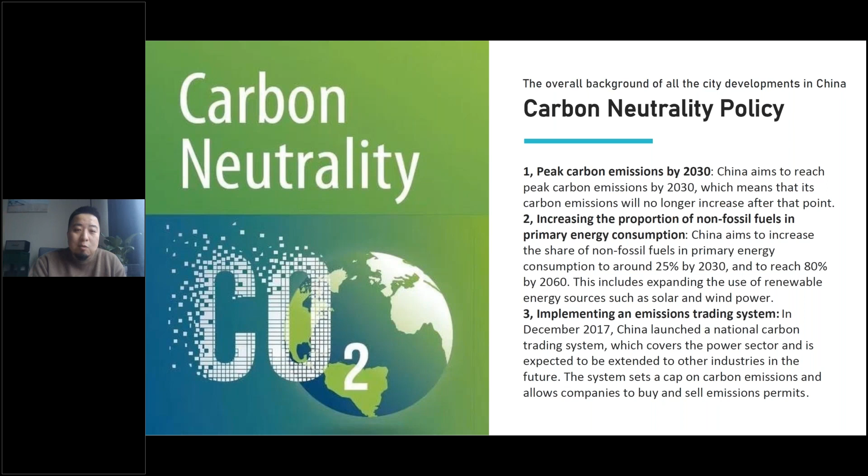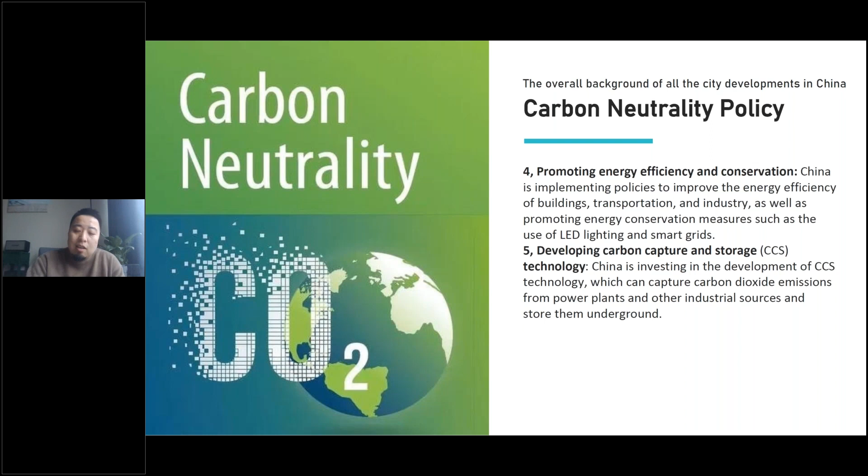By reaching that task, we have to do many things, but the one most related to our field of architecture and urban planning is number 4: promoting energy efficiency and conservation. This is the one I will explain in detail.

The first thing is, in order to control carbon emissions, we have to apply a green building standard. As we know, construction takes more than half of the entire carbon emission worldwide, so this is the first and very important thing we should do.

Until now, almost all government-funded buildings, including residential and public buildings, need to reach at least 2-star standards, and some even need to reach 3-star standards. Since time is limited, I won't read everything in detail, but if you're interested, I'll show you more in the Q&A section.

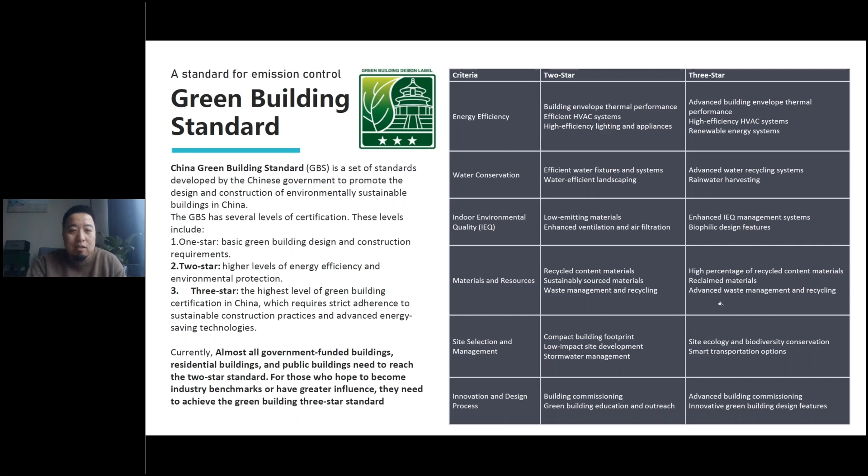The second thing, which is even newer, is that we just published a general code called the General Code for Building Energy Efficiency and Renewable Energy Utilization. This was implemented last year starting April 1st, and it's even more strict.

Looking at the numbers, the average energy saving for residential buildings has to be more than 75%, while public buildings should be at least 72%. Since it's very new, as architects we need to develop our design skills, but also seek more potential through cooperation with foreign techniques and foreign companies.

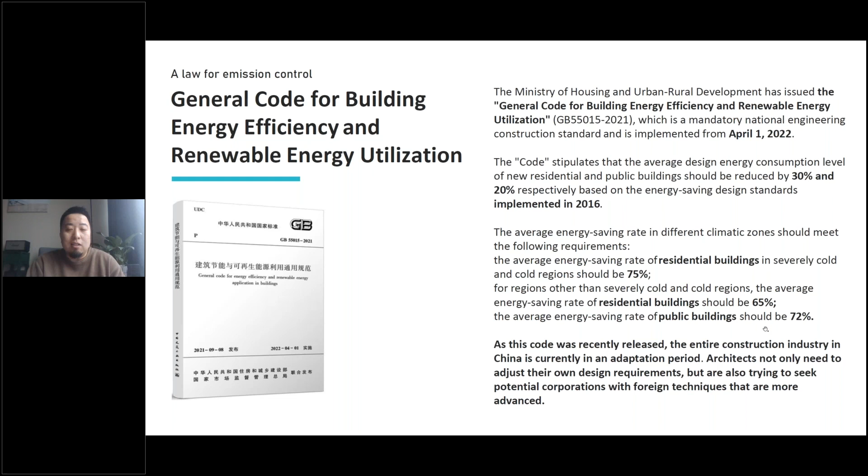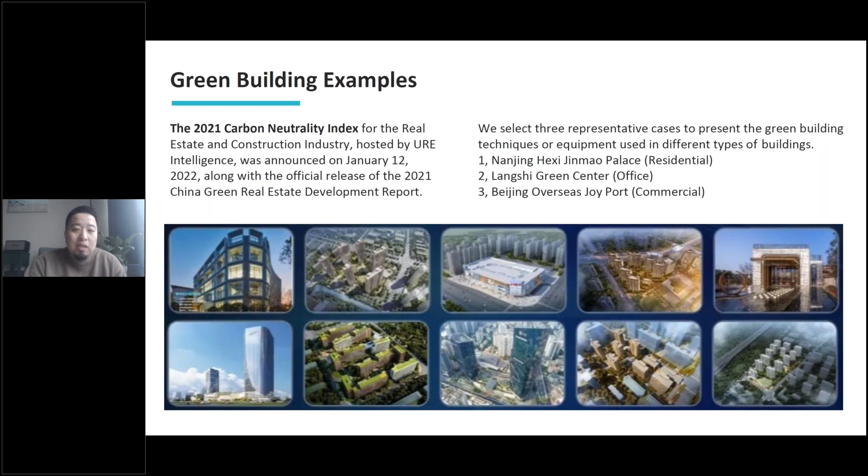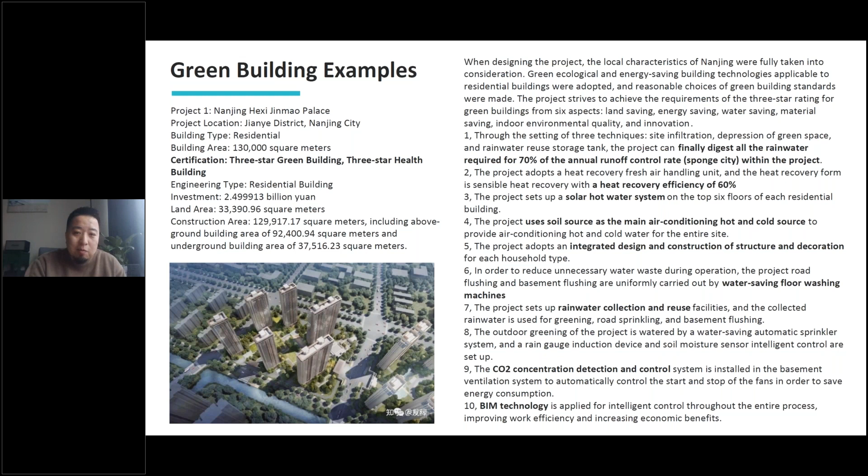I have some examples of green buildings, but I won't read them in detail, just show some keywords. For example, this first one is a residential building that mainly focuses on technical things; we can see many keywords highlighted in black. The second sample is an office building.

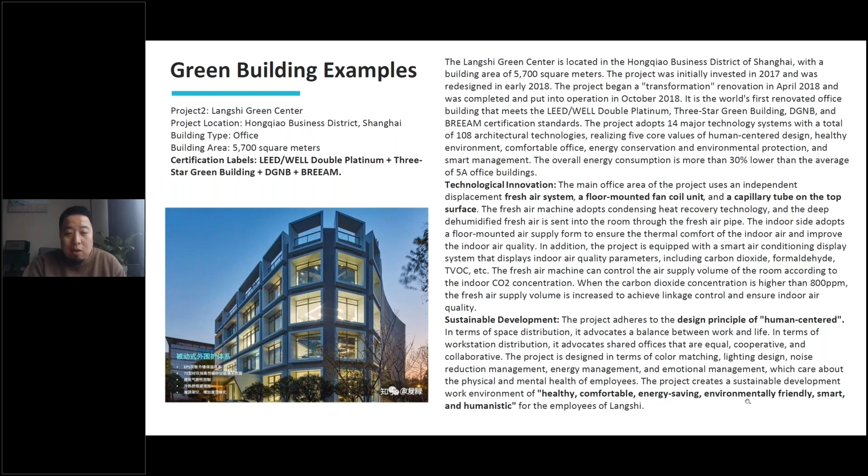For this office building, the designer also took a human-centered design principle, meaning more healthy, more comfortable, more energy saving, more environmentally friendly, more smart, etc. For the third example, a commercial building, energy saving, sponge city concepts, and construction waste management were taken into consideration.

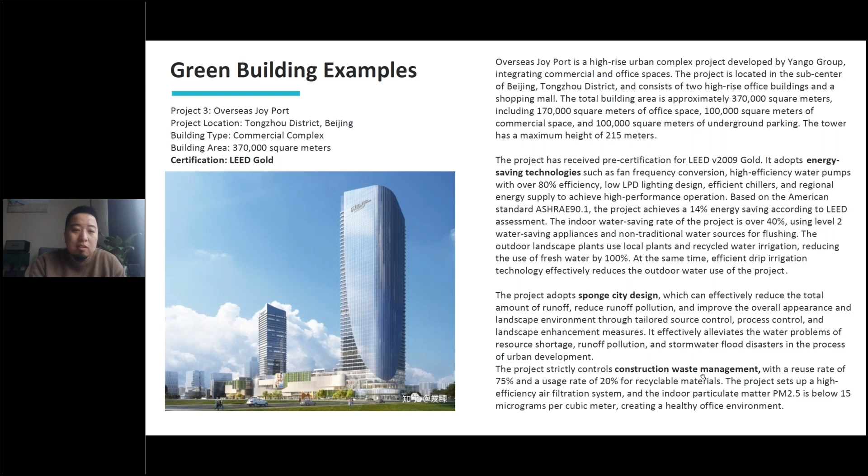So this is the first step, controlling carbon emission. The second step is, since we already have lower carbon emission, we need to find an alternative power to replace carbon-based energy, and the answer is silicon — by saying silicon, I mean photovoltaic technology.

First, I'll show many of these policies. You can see there are many, among which maybe this one is the most important: the 14th Five-Year Plan for Renewable Energy Development. This means this document has to be followed within the 5 coming years across all of China.

By promoting this policy, the government also prepared a lot of subsidy for it. For example, 2.58 billion yuan will be applied as a reward this year by the central government. By taking this amount of money, we can also take another amount from the local government, which is quite good.

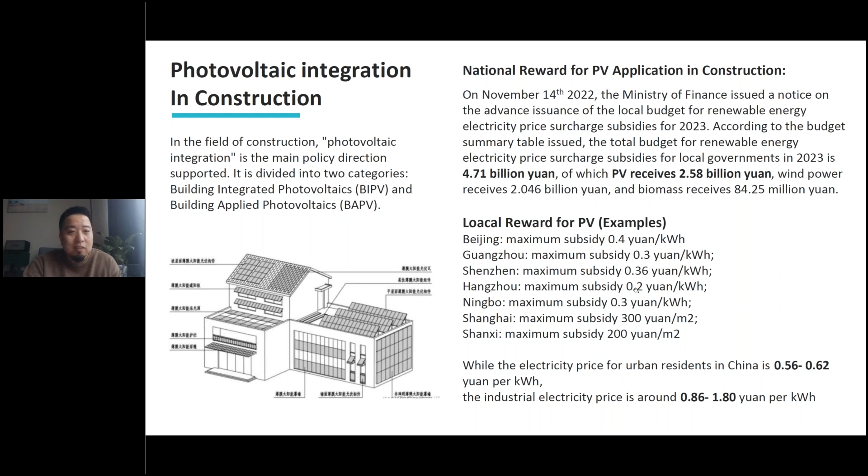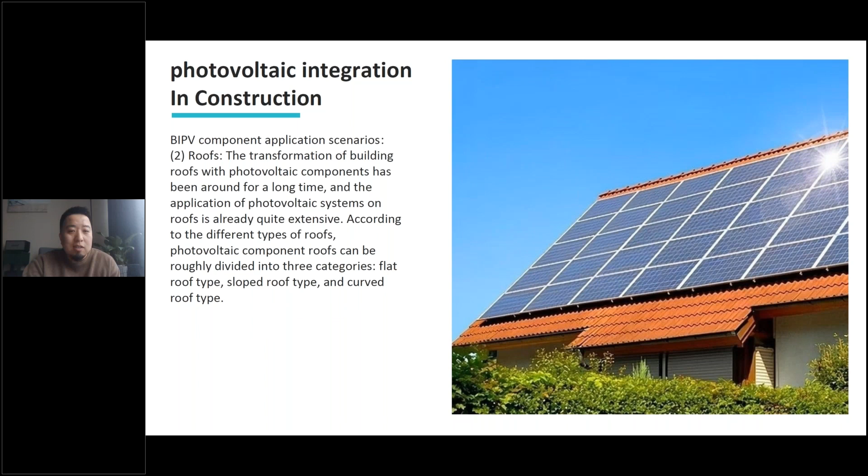The photovoltaic techniques can be applied both in curtain walls, as shown in this page, or in the roof, or it can be even applied on the components on the facade or the windows.

By trying to understand the integration of this PV panel into building design, I will introduce this competition called Solar Decathlon China. Decathlon means 10 races put together, and for this competition, the 10 goals are architecture, engineering and construction, energy, communication, market potential, indoor environment, renewable heating

and cooling, home life, interactive experiences, and energy self-sufficiency. We can see that the target of this competition is more or less the same as the target of the Chinese government for green building. So that's why this competition is quite popular, and I would say that it now stands for the highest level of green building technology in China.

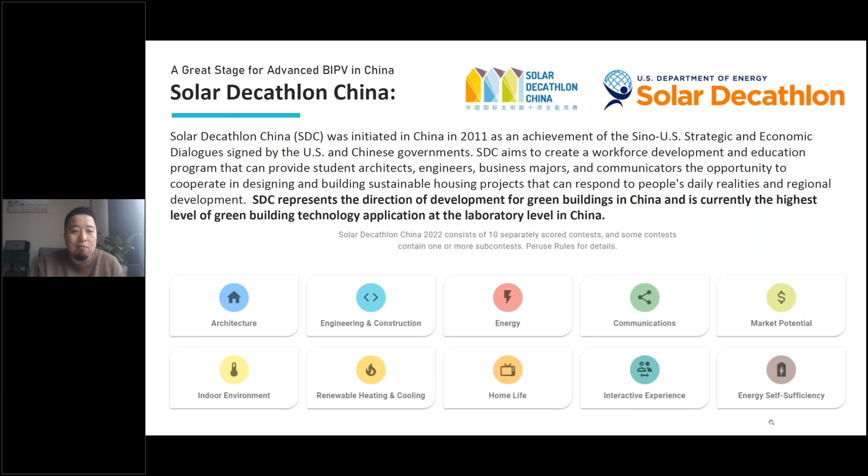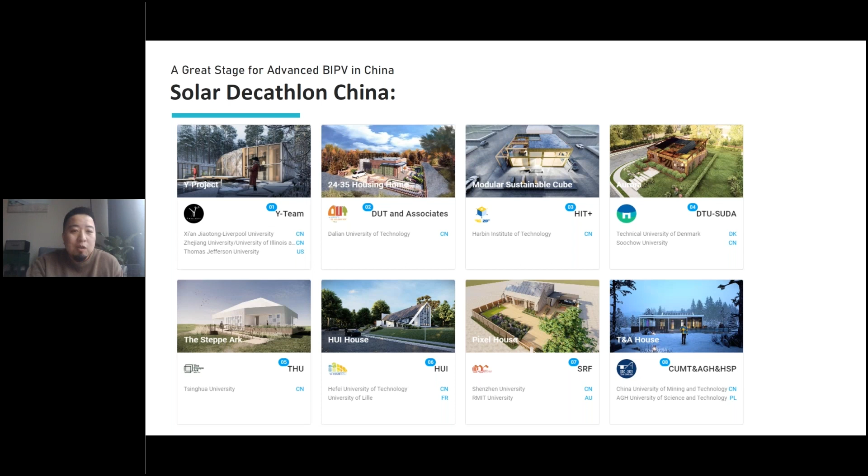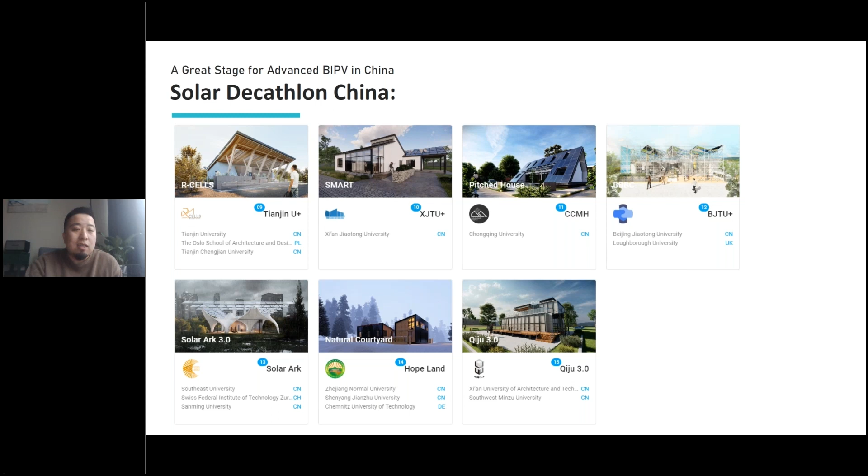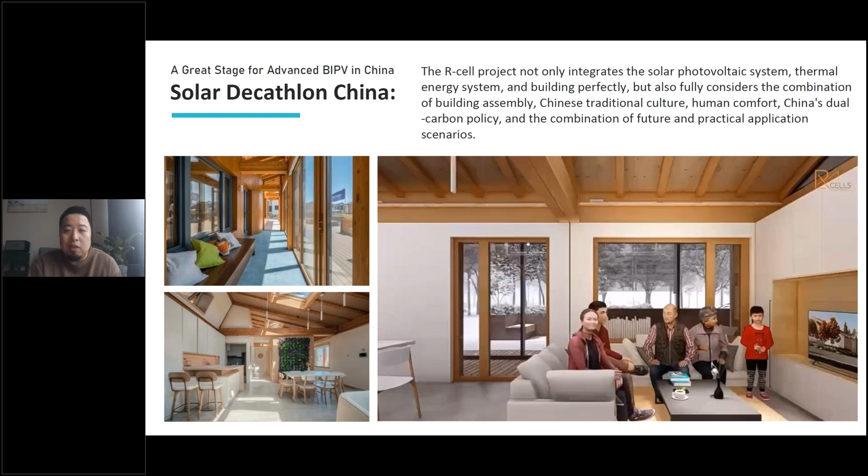I actually have a video here, but due to the time limit, if you're interested, I'll show this video in the Q&A. We can see that we have all of the power from the solar panel on top of the roof and on the window. But in the meanwhile, we also think about the thermal system, the building assembly embedded with Chinese traditional culture, human comfort, the Chinese carbon policy, etc.

The third step is, since I already have this new clean power from the PV panel, this electricity power generated from the silicon is DC instead of AC, which is normally used in most systems. So we need another power conversion to convert the DC into AC and let it connect together with the national grid.

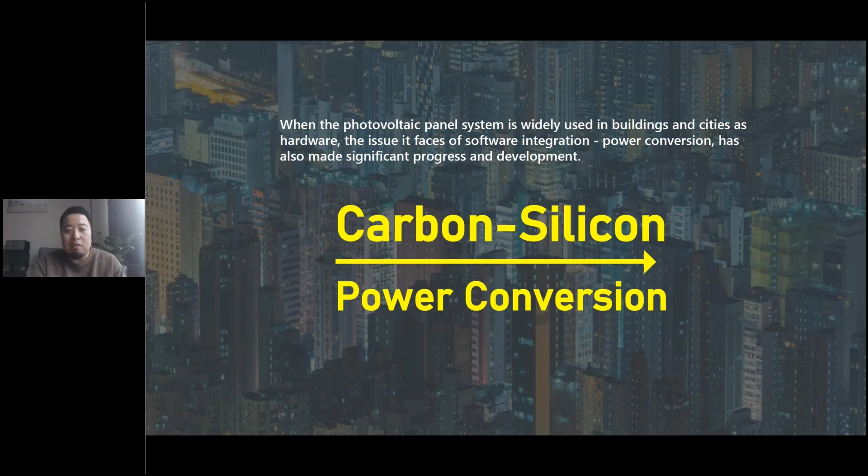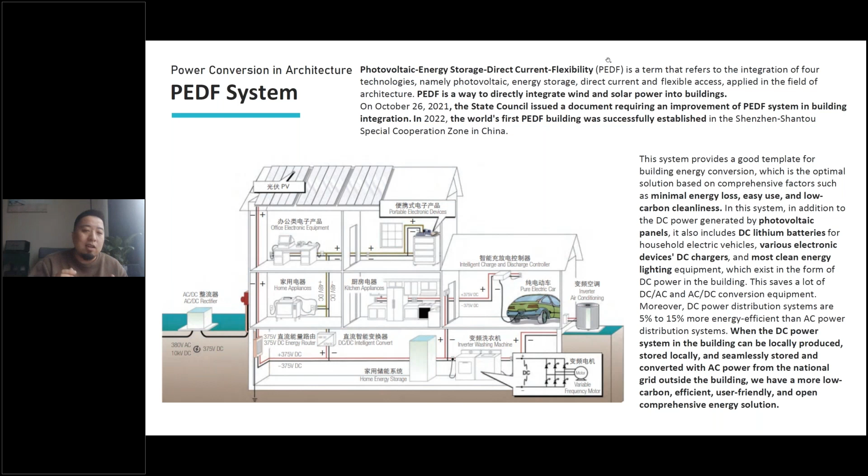This is also quite influential for our architecture and urban design. The first system I want to introduce is called PEDF, which means photovoltaic, energy storage, direct current, and flexibility with the AC grid. This is a bit complicated to explain, but we can easily understand it as a very efficient system that, by applying this, allows us to hold both DC and AC power together in a building.

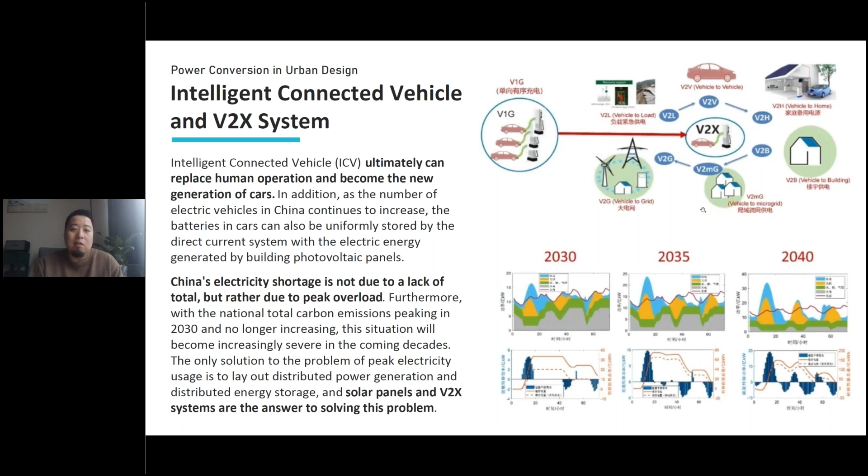So by applying this, since we already have this system, we can even think about embracing more DC power together, which is what I call V2X. V is vehicle, and the vehicle can do load, building, many things. The important thing is, since China already has a huge amount of electric cars, if we can take all of the batteries from the cars together, we will have a very big amount of storage for the building in the future.

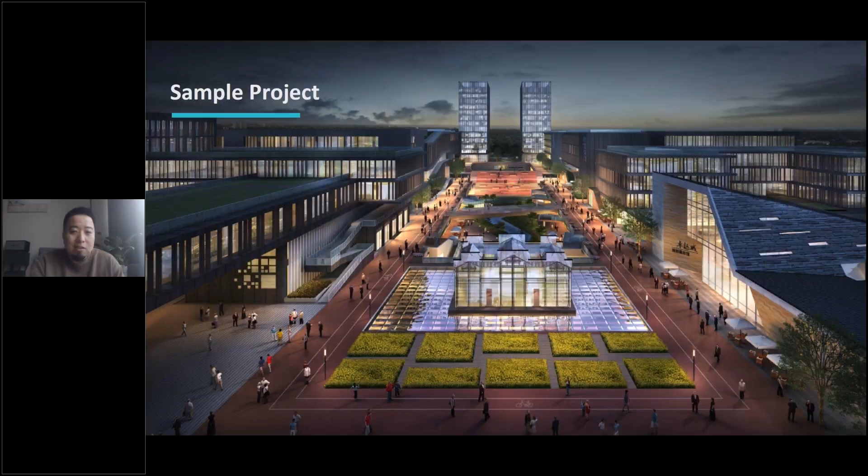I'll use one example to show this whole process. This is the image from my design 5 years ago. After I designed this building, of course it's built - this is the picture after it's built. But after 5 years, this year, my client asked me to do a renovation to introduce more of the DC system, mainly the photovoltaic panels, but also the charging stations for V2G to V2B that I just mentioned.

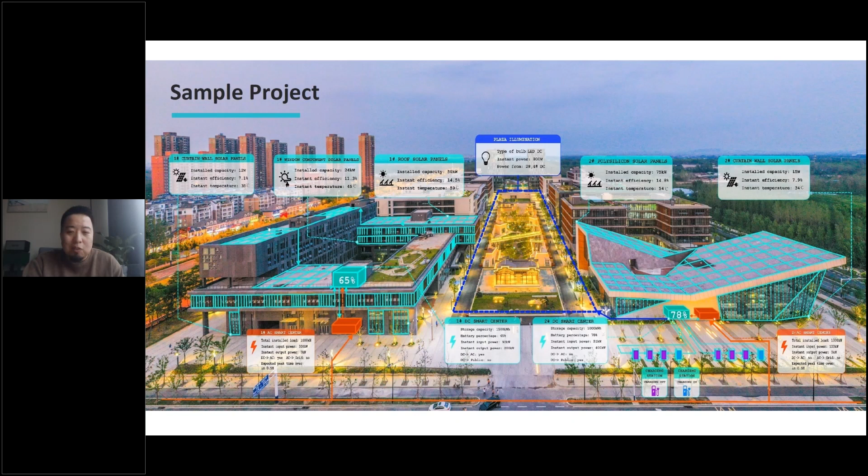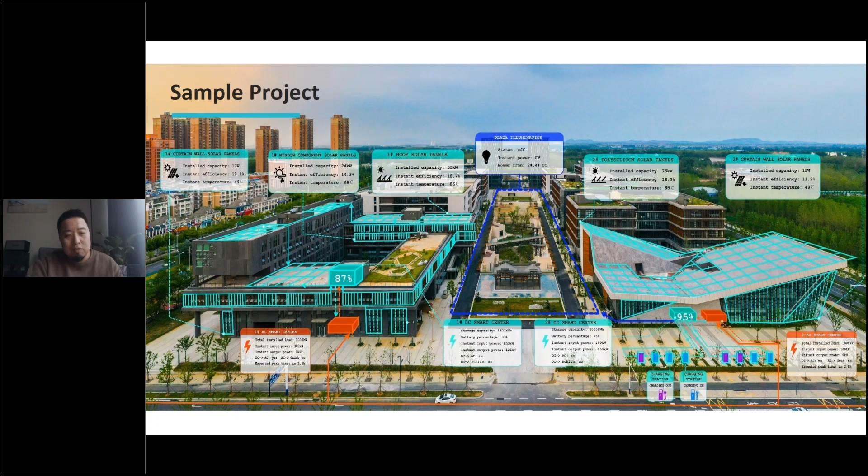We can see in this system, all of the green part represents the DC power system, and the red part, which is only a very small proportion, is the conventional AC system. The DC and AC interaction is very flexible, and when the pressure is high, we can have this DC power charge back to the city grid even. So it's a very smart system.

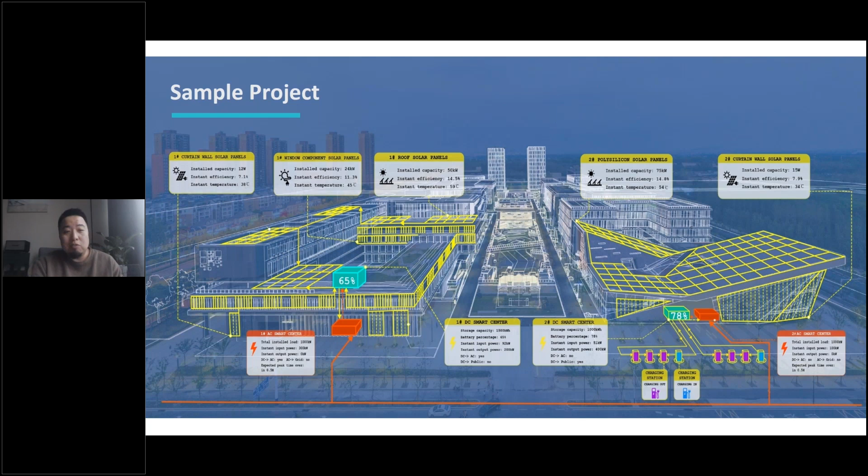I also built this in a metaverse way, a virtual system that I can use to help the client control each of these systems separately. So in total, this approach is more or less already approaching the smart city, let's say.

And this one is, of course, not innovated by me myself. It actually has a guideline for this power conversion called the 4 Networks and 4 Flows theory. This comes from my teacher, academician C.C. Chan. I will introduce him a bit later.

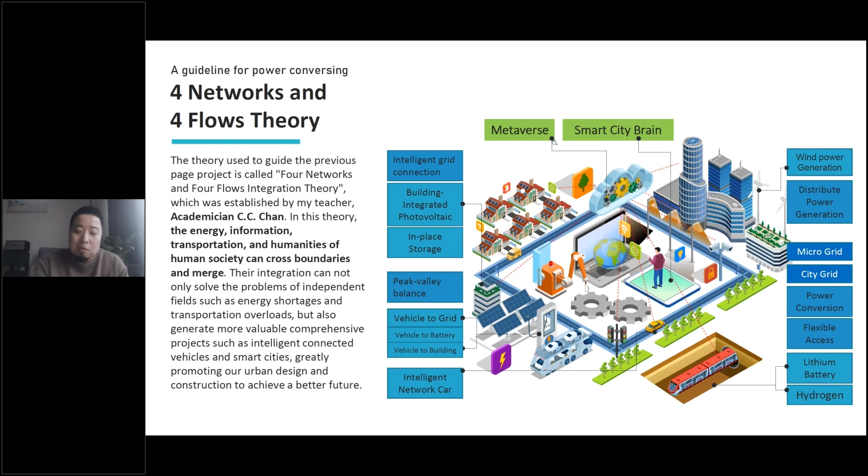But by watching this concept image, we can see that if we really can put the city's energy, information, transportation, and humanities together, we will imagine that our city in the future will have a big variety of power supply, as well as a very smart way to control it - for example, embedded with the metaverse - and it will become a prototype of the smart city, step by step.

He is my teacher, the academician C.C. Chan that I just mentioned. He's an academician of 5 countries. He is also known as the father of Asian electric vehicles. Now he holds a very significant influence in enterprises and projects related to new energy and smart cities in China. He also established a platform called the International Academicians Science and Technologies Innovation Center.

That is the place where I'm from. We already have 7 centers now, but hopefully this summer we will have 4 more centers, including the center of Australia. We will see.

And this page is for myself. I'm the architect. I did some of the build projects, such as the Judo Hall for the Asian Olympic Games in Hangzhou this year. I also built the Tianjin Binhai Library, which is now known as maybe one of the most beautiful libraries in China. I also built a pavilion for the Boao Asian Forum.

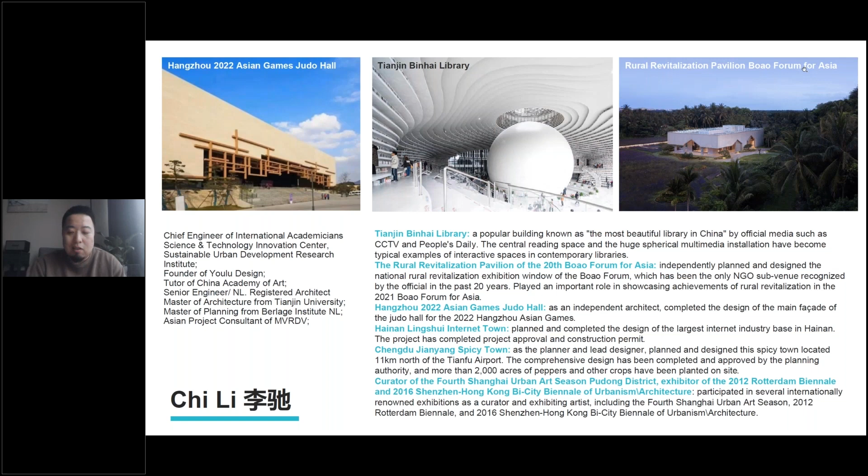Since a couple of years ago, I've also been very interested in green building and design that can be integrated with more technologies and more low carbon techniques together. So as a summary, I will go back to the starting point, which is first we need to have this.

We first announced this carbon neutrality policy. The first thing is we have to do emission reducing by applying the green building standard. The second thing is we need to find new energy as an alternative to carbon-based power, which is why we found PV panels, and we have many policies and subsidies for it. The third thing is we also developed our power system, which we call power conversing. This will also be put together with what we call the intelligent connected vehicles system.

In the end, if we put all of this smartness together and integrate these things into the design, we will hopefully get a bright future with smart cities. So this is an evolution towards the transformation of carbon-based energy systems, but it can also be a revolution for the development of Chinese architecture and urban planning. That's my speech. Thanks for all.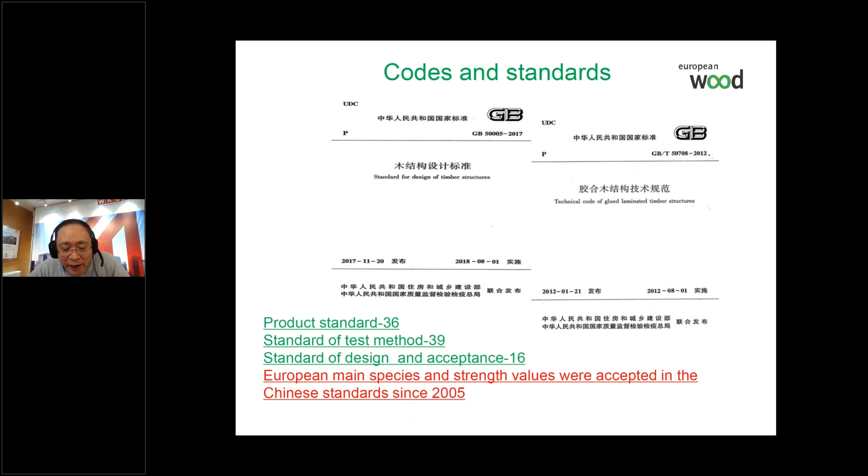So far China has made about 91 codes and standards, as I calculated, concerning products, wood products, standards of testing methods for products or structures and elements, and standards of design and acceptance. European Wood has been involved in more than 20 of those, which of course are the very important ones. Since 2005, European main species like spruce, pine, larch, and fir were accepted in the Chinese standards.

Fire, we call it a bottleneck for the application and quick development of wood construction in China. So since 2005, we started cooperation with China Fire Authorities plus the China Fire Research Institute to make and improve the existing China Fire Code, which we call GB 50016. That's the most important fire code to regulate and control the application of wood products and wood construction in China.

As you can see, from the beginning it was only allowed to be 3-story, like timber villas mainly made of timber frame from North America. Now, in the new amendment to the fire code, it is allowed up to 8-story, applied with engineering wood, what we call heavy timber structure. So most probably from this year, 8-story timber structures will be built in China. Of course, China is also improving their fire concept, moving from the traditional way to the performance-based, modern approach.

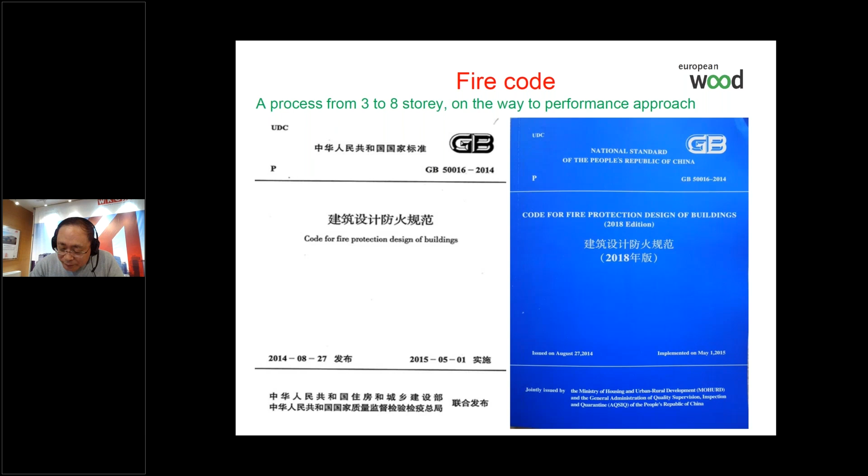This is one very important page from the new amendment of the fire code. Hopefully this new amendment will be approved and issued this year.

You can see from this page that from 3-story to 8-story, for type 1 that means heavy timber structure with engineering wood, with glulam, with CLT or LVL. For the second type, that's the timber frame. And you can see the height, 32, that also progressed compared to 10 years or even 20 years ago.

So from this table, you can see that engineering wood like glulam and CLT has a very, very big market and application scope for different types of buildings in China.

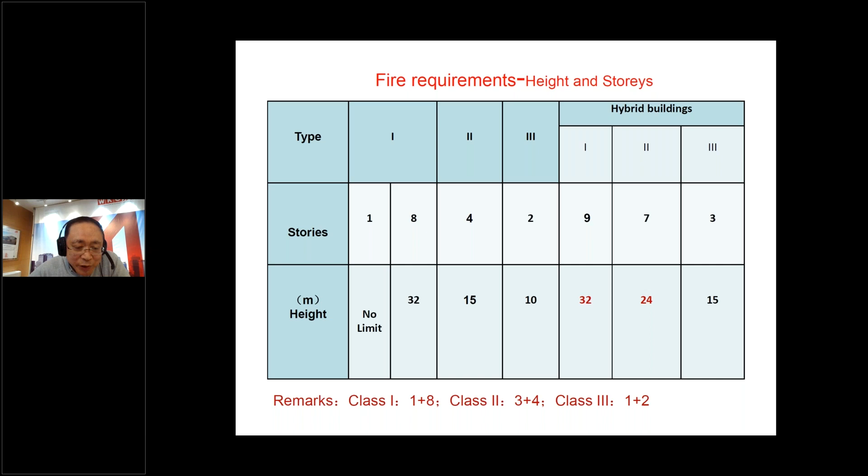Some basic facts for wood construction in China - I will not read all these figures, just roughly that timber structure, whether pure timber structure, hybrid, or partially applied wood products or elements on different types of buildings, is about 45 million square meters existing.

From 2000 until 2021, in most years it is on the rising trend. Of course, from 2019 there was a decline because villas were not allowed by the government for various reasons, so that year the figure declined. Then in 2020, because of COVID, the figure decreased. From 2 years ago, it recovered. I hope that in 2022 the figure will be even bigger.

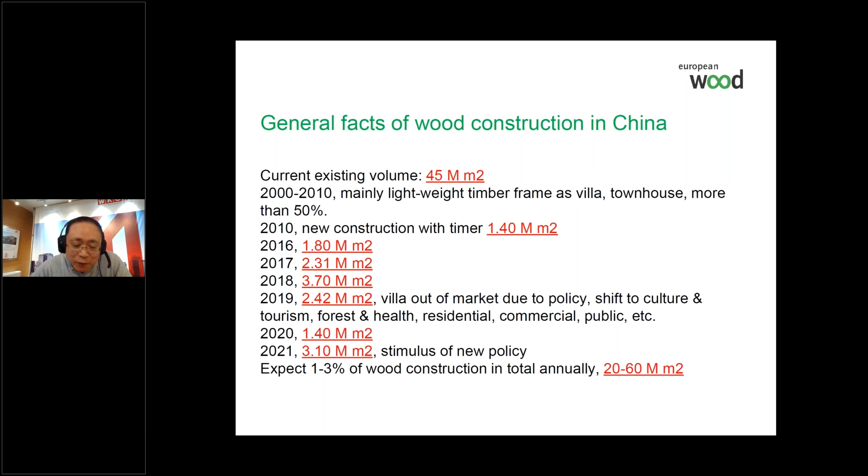So we just expect - if annual new construction is 2 billion square meters, and wood construction takes up only 1%, then it will be 20 million. If more, the figure will be bigger.

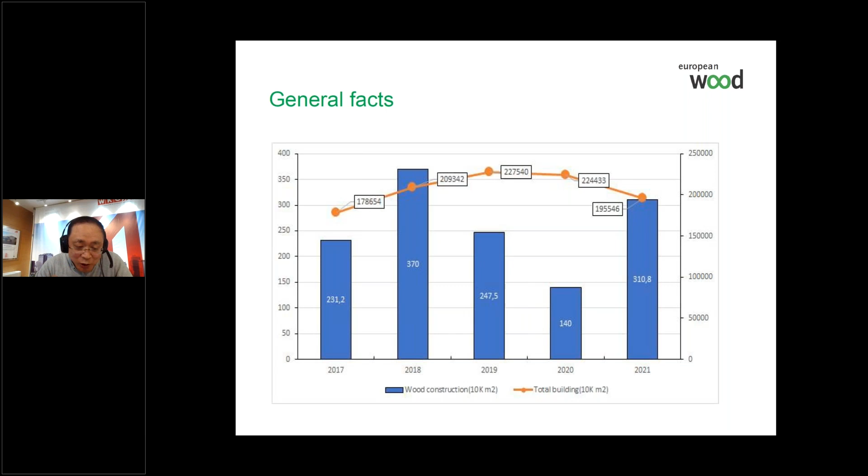And this diagram just reflects what I just mentioned, that wood construction takes a certain percent of the total building volume.

Something about the glulam, the engineering wood. You can see some species that have mainly been used for the production of glulam industry in China. The dominating species come from Russia and North America. Of course you can see that spruce and pine from Europe are on the rise, increasing rapidly.

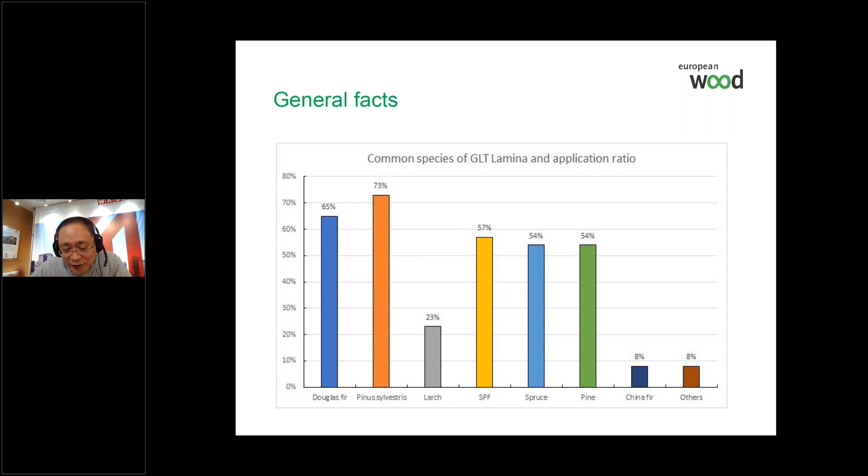From 2018 to 2021, the production of glulam in China, the annual production volume was mainly between 200,000 and 300,000, some figures between that. It's not big.

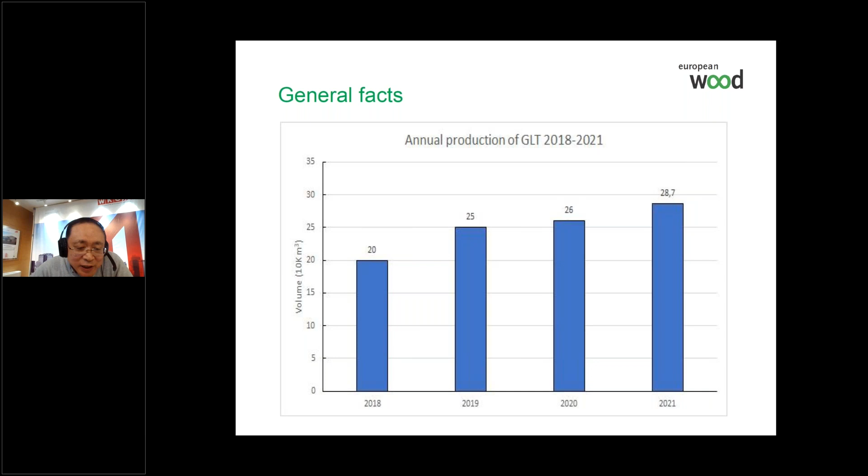Talk about glulam - now we have more than 300 producers, including structural and non-structural products, more than 100 production lines, and design capacity of 0.7 million. But actual production capacity is only about 200,000 per year. If your company produces 10,000 cubic meters per year, you will be among the top 10 companies in China. So all the Chinese producers are not big - they are very small compared to those in Europe.

And CLT - they only have 4 producers. And LVL is mainly for furniture, not for structure yet.

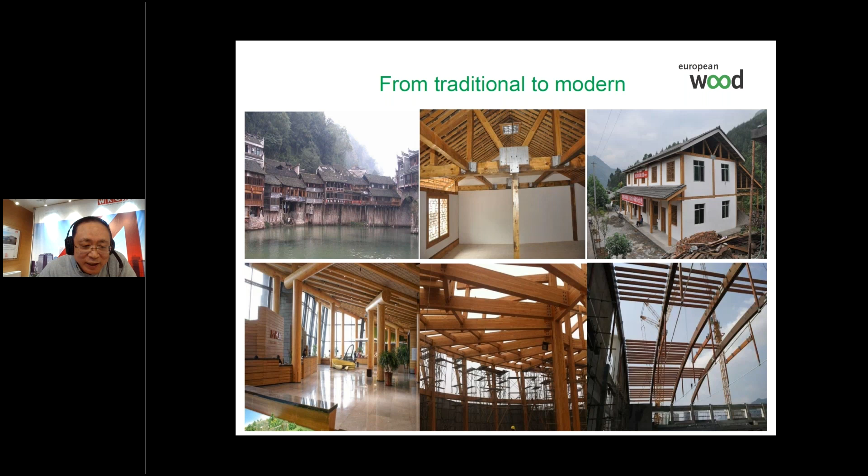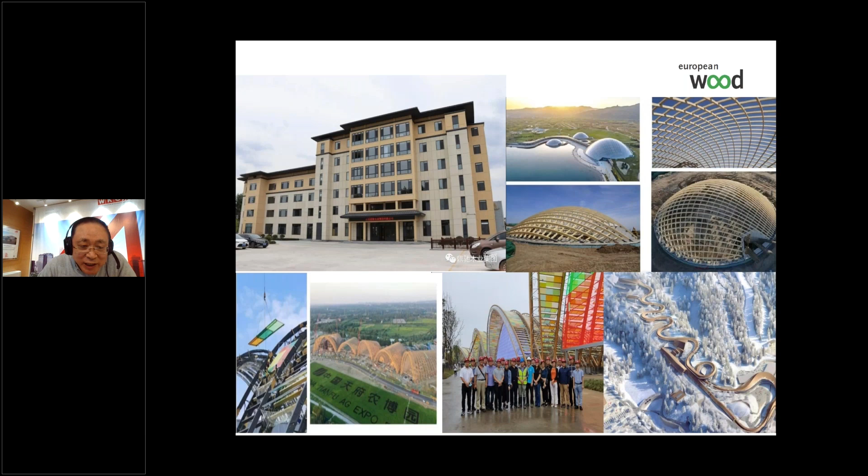Products moving from traditional to modern, that's the trend - from 3-story to large span. I guess the next speaker will talk about the big projects finished in China with some material from Austrian companies, office building at Expo, and for the Olympics as well.

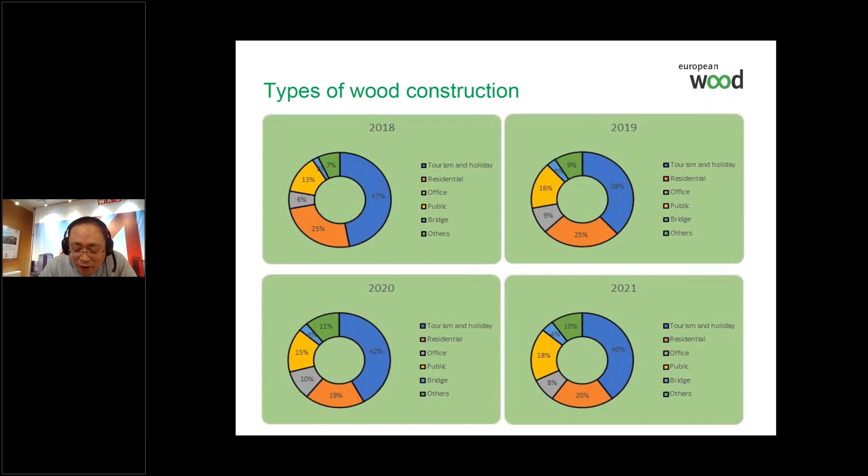These diagrams show the percentage of different types of construction, mainly in the China market - mainly residential, office, and for tourism and holidays. Over these 5 years, it remained the same percentage, not too much change.

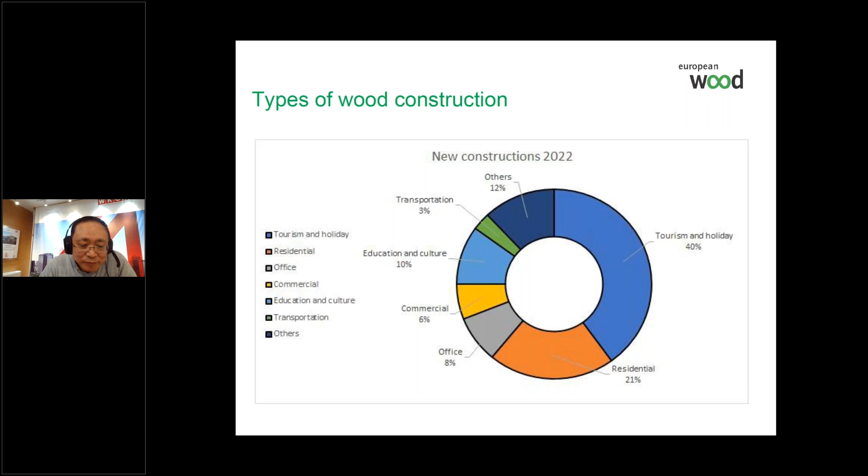So the problem and challenge in China is that the market is very big, but the wood construction is very small, because of many reasons: the cost, competitiveness, and the policy from the government to encourage and support it, and also land policy, and also the China industry trend that is unbalanced.

Many producers and manufacturers are using manual work even for gluing and drilling. So logistic transportation is not mature, and also there's a lack of knowledge, lack of professionals, and the research from the universities cannot be transformed into the market to make profits as new products and new technology.

And also the government and industry are still wondering and hesitating how to use the local material, and also how to balance the too large percent of imported timber from many countries.

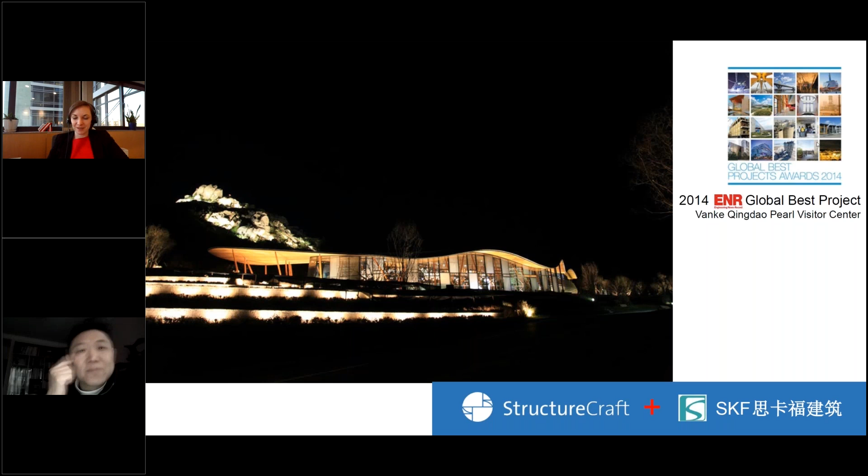Hi everyone, thank you for your time listening to my experience about wood application in China. We have been working with this type of landmark projects for over 10 years.

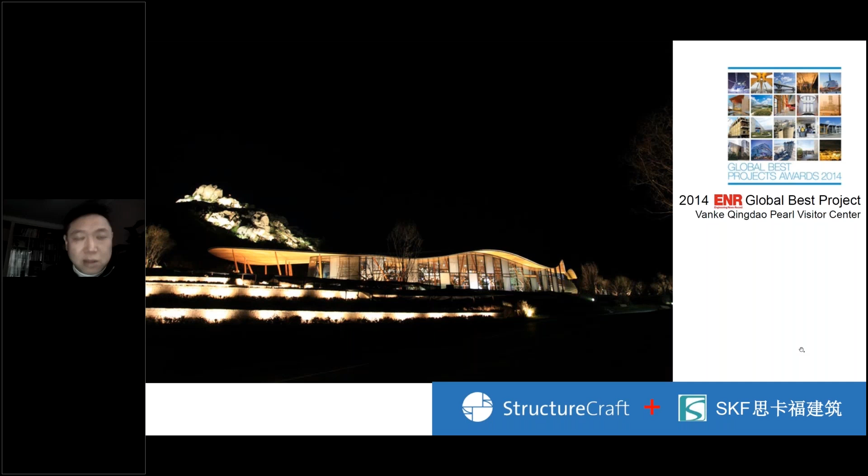Now, as you can see, the first project I'm showing here, we did almost 10 years ago. I personally have been working with Canada Wood for over 8 years, and then I started to practice wood buildings in China. Of course, my major technical partners are still based in Vancouver.

This is the first project we did in Qingdao, one of the coastal cities in China, like before, that's for our developers - a visitor center, actually it's a sales office. Most of the early stage wood structures in China were for developers' sales offices.

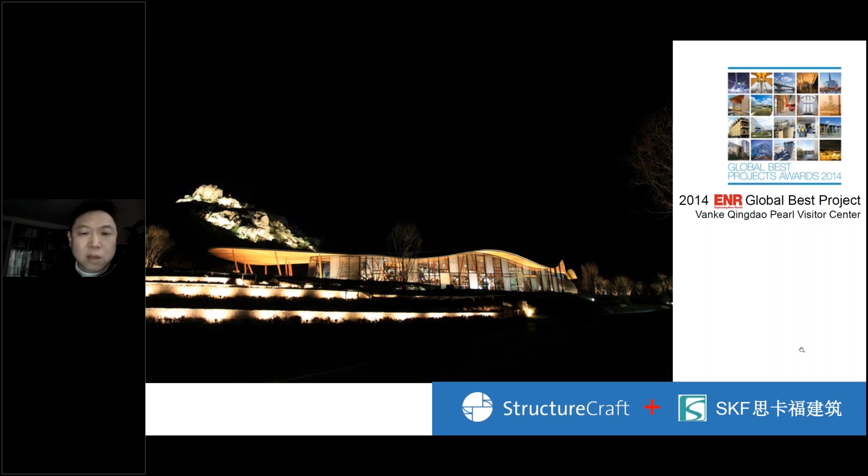Fortunately, we got very top resources in the world, not only on the design side but also the construction as well as the material. So we got this, in 2014, the ENR Global Best Project award.

And after that... let me see if the page goes on. Just a minute. Sorry. Yeah, I have a problem too. You have to click into the presentation. Yeah, I'm already clicking that, and yeah, that's the second project. Oh sorry, I have to go back a little bit. It's a little bit, yeah.

And back to 2018, we started working with one of the famous Austrian architects, Delugan Meissl, DMAA, on this Taiyuan Botanical Garden project. For this project, all the customized glulam members are from Austria and Germany. This project also had a big success, with lots of awards from all around the world - not only structural awards, but also architecture awards.

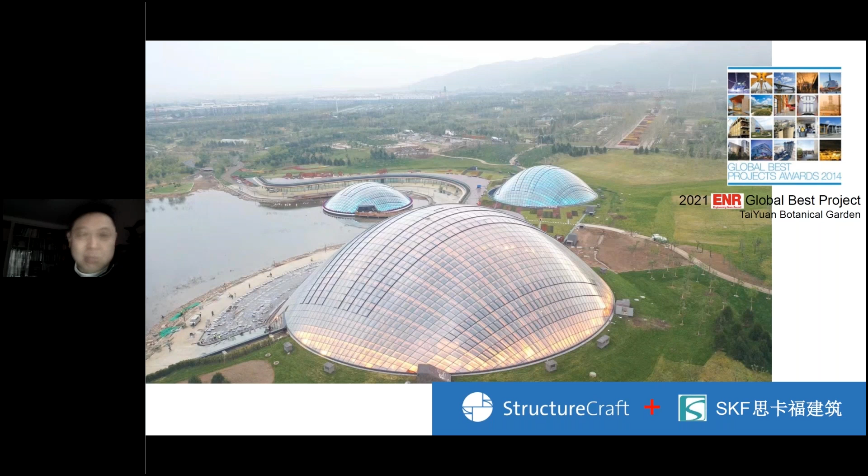The next project is the newest one, which we finished almost 1.5 years ago. For this one, all the customized CNC Glulam members also came from Austria. It's a big volume, 7,500 cubic meters, with all the train shipping from Europe directly to the site, to Chengdu city in the southwest of China, a big volume of containers.

Let me give a brief introduction about our model, how we make those projects happen. We have a team: first of all, SCB StructureCraft, a very famous EPC company based in Vancouver, and we also have an office in Shanghai, SKF, my company.

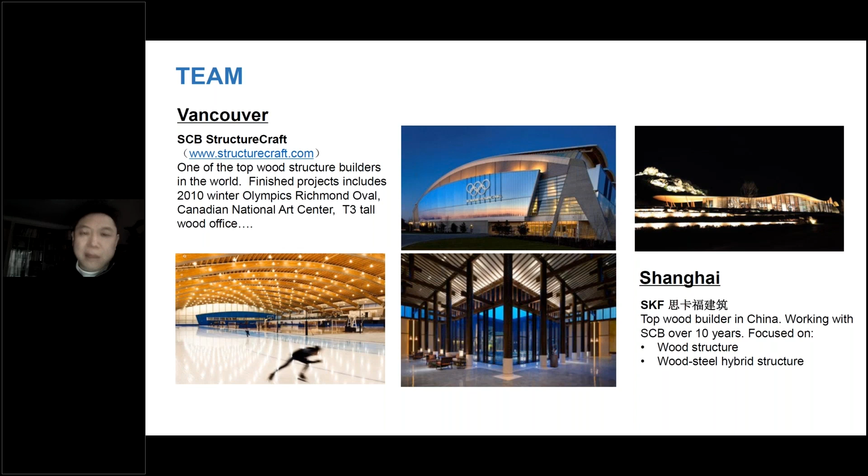With my partners, we work together to make all those projects happen. The SCB guys are very good engineers with very experienced carpenters, and they send their team over to China. And then we also buy all that wood from Europe and ship it to China.

The next page goes to the EPC model. Our business model is simple and clear.

We normally start working with architects, both overseas and Chinese local architects, from the concept design stage, telling them wood is a good solution. We do value engineering and SD package for the architects. Based on that, when the owner confirms our solution, we start the 3D models and CD package. With all those approvals, we start the shop drawings as well as the material procurement, and finally we assemble all the members on site.

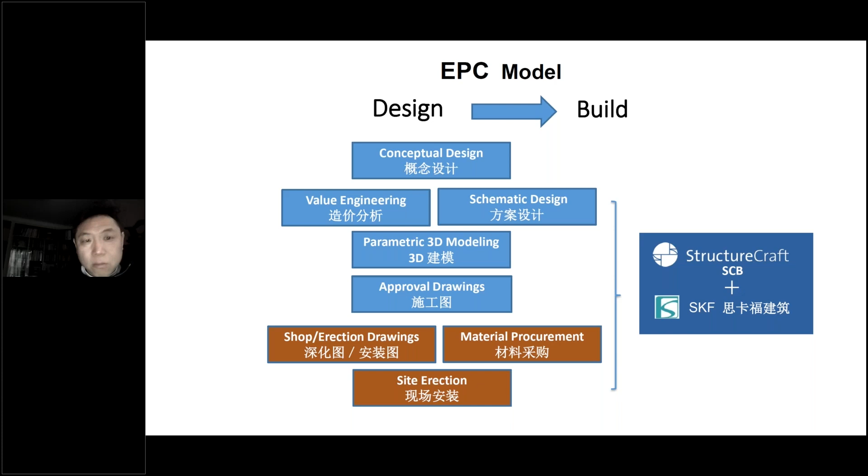Talking about the engineering, we definitely found the Chinese architects and the local DI, we call LDI, lack a lot of experience in wood design, that's for sure. So we need overseas support from Vancouver or elsewhere to help them do all that design.

For some special buildings, like the picture shown on the right, we also need to do testing to prove the wood capacity and connection capacity, and also all the shop drawings and even the container loading plans. We use very experienced overseas resources to make the whole process efficient and give everyone a good experience with wood structure.

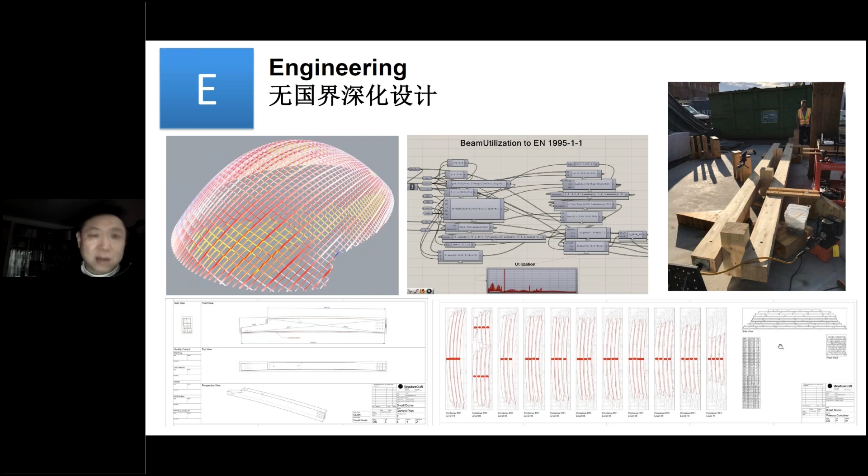Talking about procurement, we had a very good experience working with Hasslacher in Austria, and they are very professional. They have a very strong tech team who could connect with our team in Vancouver and also our Rhino model guys in London.

We also have the CNC data files sent directly to them, and they made very good quality products. With our shipping plan, we worked with them together, and it was pretty big local news - the first time Chinese railway containers got to their plant, and they shipped out all those CNC, the Glulam members.

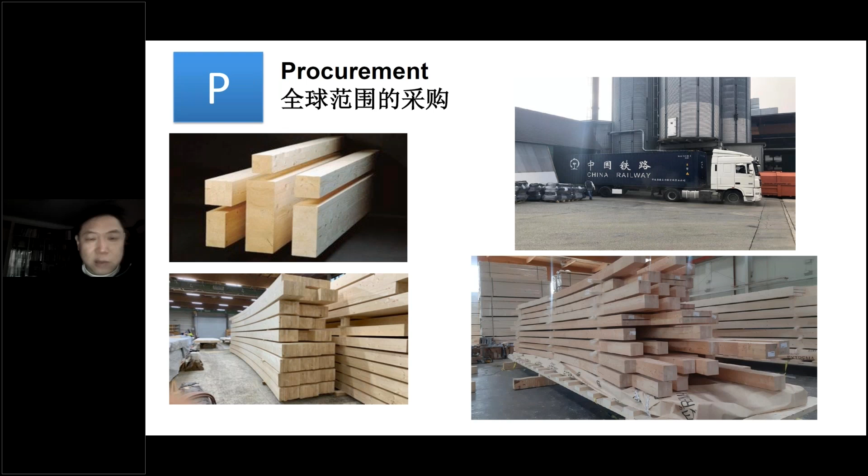We also procure all those metal connectors, like the screws, from Italy, from Austria, from Germany, and with all those packaged together, we ship that to China.

For construction, we are not only focused on small types of buildings - the projects you can see, as well as our other projects, are big projects. Normally they are public buildings, one story but huge size, or tall buildings using Glulam.

So we work closely with guys sent from either Germany or Vancouver to work together on site, talking with the European architects or North American architects directly.

We also do a lot of construction simulations before we really install all those components. We have a good, very smooth process, because wood structure assembly is a very typical process, which is a hot topic in China right now about the assembling building industries.

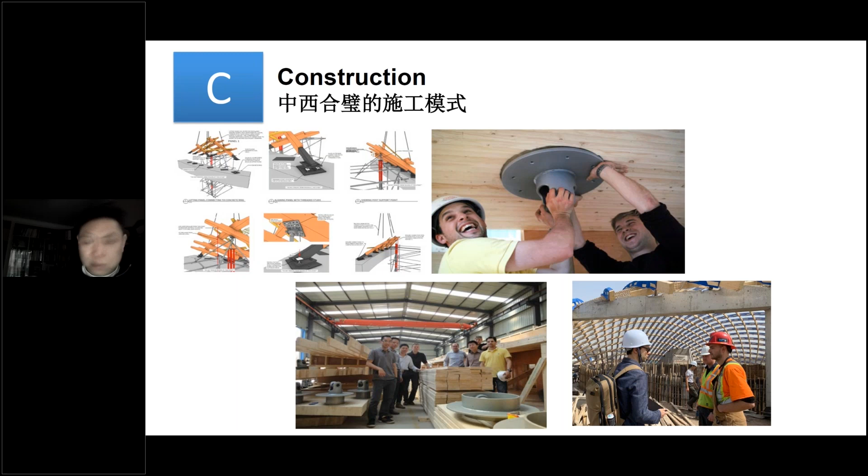I'm going to give you a brief introduction about the projects we've been talking about here. This one we call the Tianfu Agriculture Expo, composed of 5 vaults, each of huge size, already over the Chinese code. These 5 vaults have pretty big arcs, and the maximum one is over 118 meters, making it one of the biggest wood structures in the world.

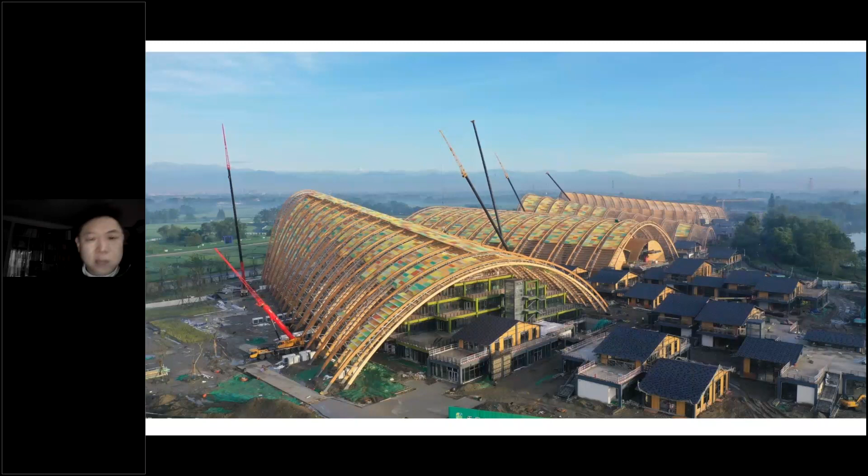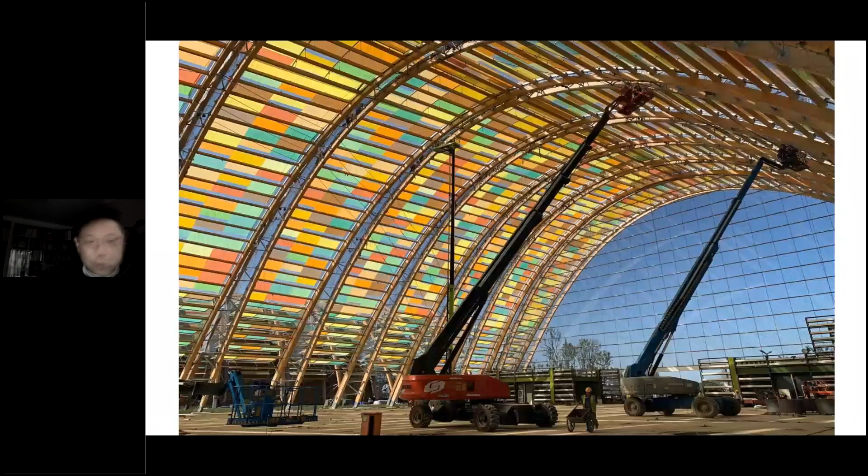Before we did this project, we spent almost 2 years planning, and we also inquired about Glulam solutions from a couple of Austrian Glulam manufacturers before we really put down the order. For this project, 7,500 cubic meters, we only used 8 months to assemble all of them, which was a very impressive process for everyone, for the owners and for the local government.

Also, the biggest issue we faced was fire issues. We did a special fire engineering process and got the approval eventually.

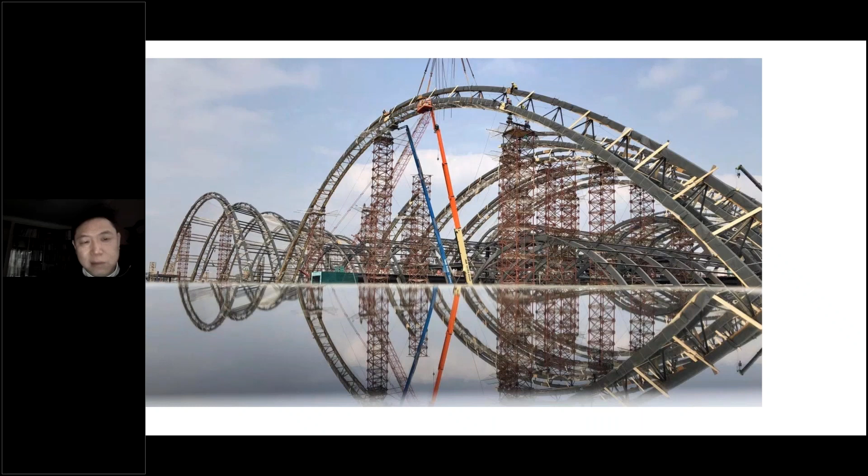For this big size of structure, initially this type of project normally happens in China as a steel structure, but as green building policy and carbon saving material becomes a very popular topic now, the government compared the cost and the timing schedule, and then they decided to use wood.

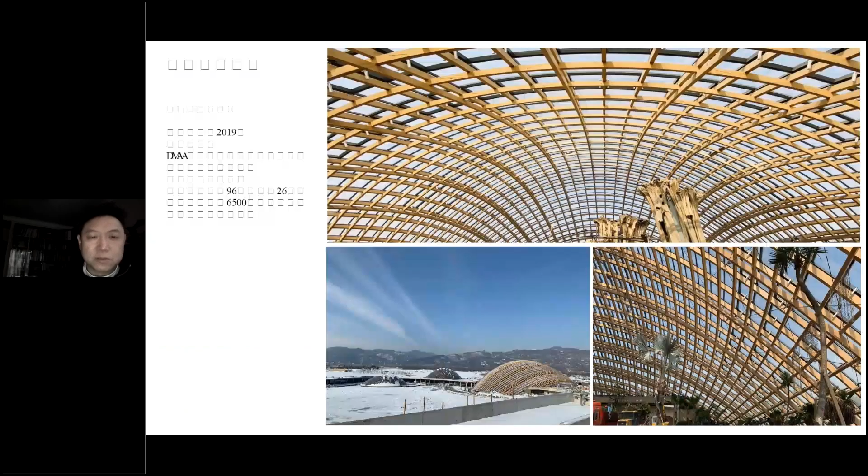And this, I didn't see the characters, but it's okay. But you see the DMAA, and this one is the 3 domes happening in Taiyuan, and it's a botanical garden, the first time wood application in China for this type of greenhouse, the botanical greenhouse, to keep it.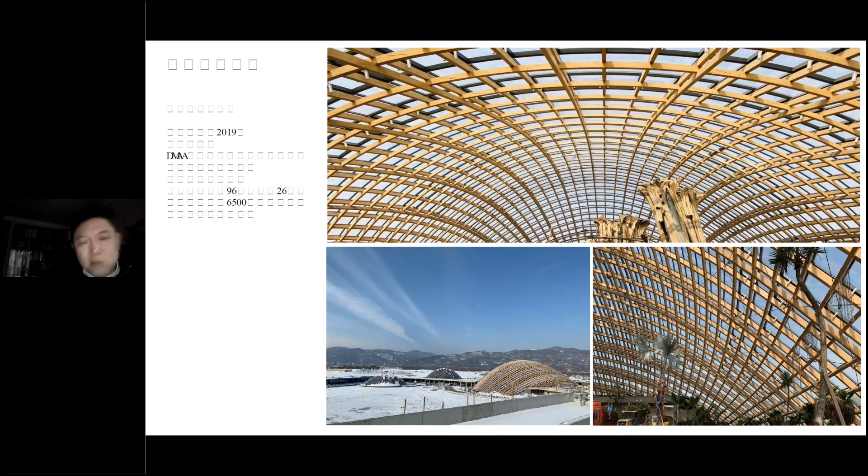It's one of the pros, they have this consistent moisture and consistent temperature, and some of the biggest dome is like almost 96 meters span, and the tallest one is 26 span.

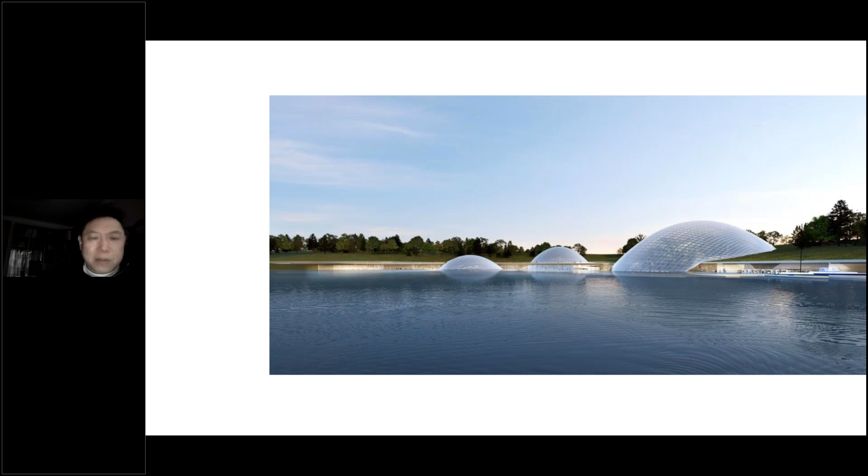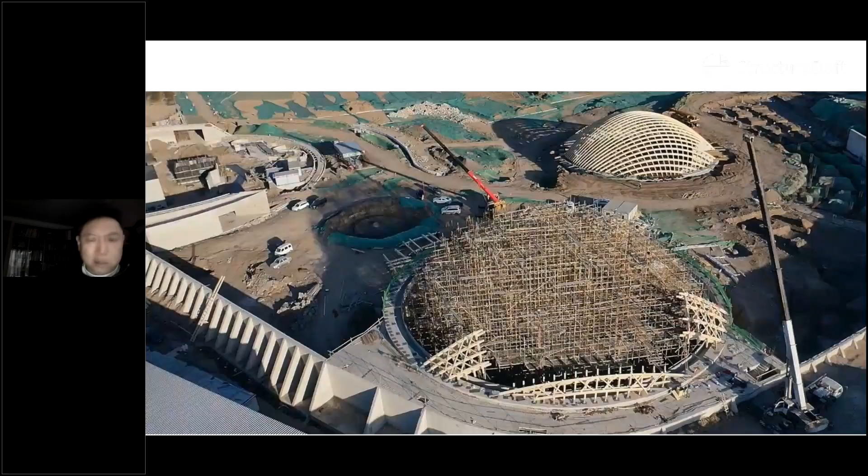And now this one is becoming a landmark in the city, developed by DMAA, the architect based in Vienna. We visited them many times, and they showed very good ideas about how they were going to do this, the first time using almost pure wood to get it built.

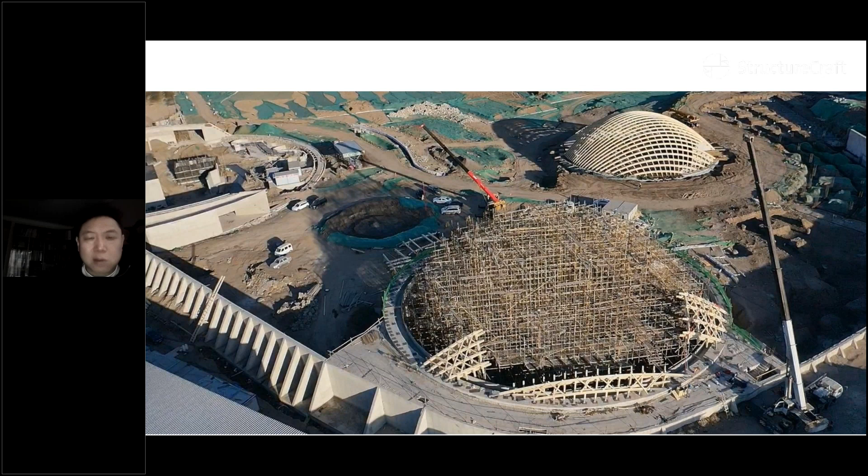And this is every component too. It's not big volume, it's almost like 2,000 cubic meters of customized glulam, and we ship that by ocean, by vessel, to one of the ports in the north of China. Tianjin is pretty close to Beijing in the north of China, and then we use trucks to ship every component to the site and assemble them into individual panels and put them together as domes.

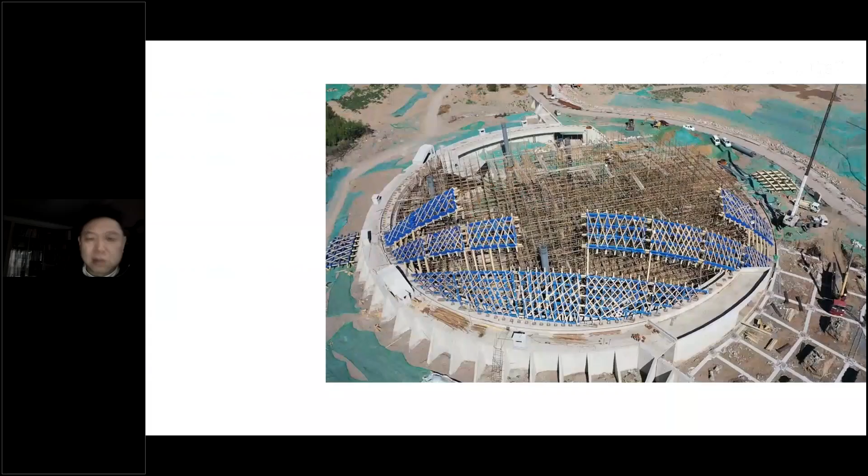So this is the process when we're doing this small dome, the smallest dome, and you can see all the glulam members are protected. We wrap it up before lifting it up.

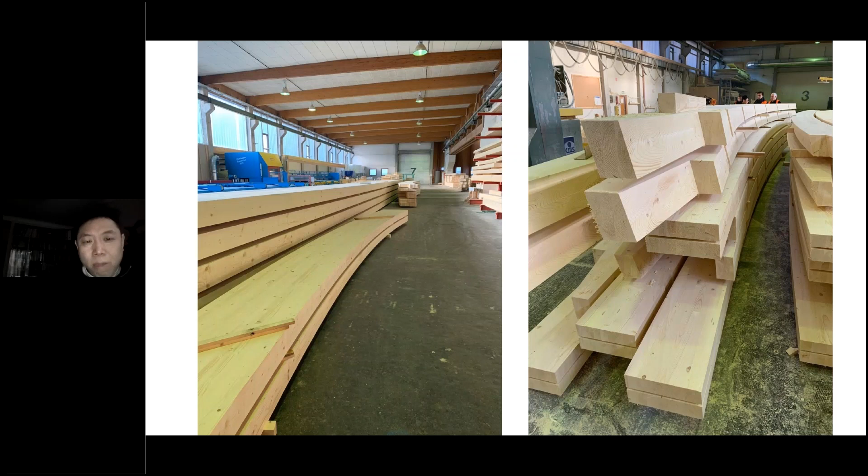And this is in one of the factories. Before, the picture showed the final products, CNC, how it looks like. For us, one of the biggest advantages of using glulam is we trust the CNC capacity in both Germany and Austria. It could be very accurate.

And when we install that, we normally do not have big problems with dimension issues. We never have that.

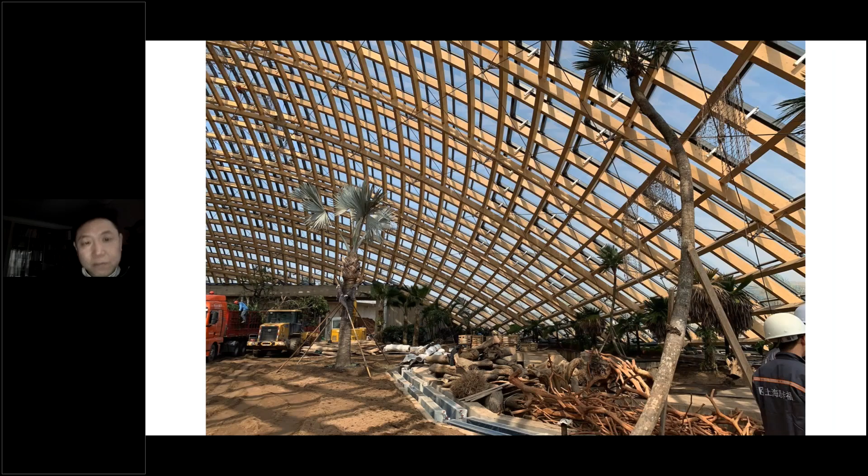So that's very close to the end of the construction, and you can see the member size, and also the cables, which provide the whole structure more stability for this project.

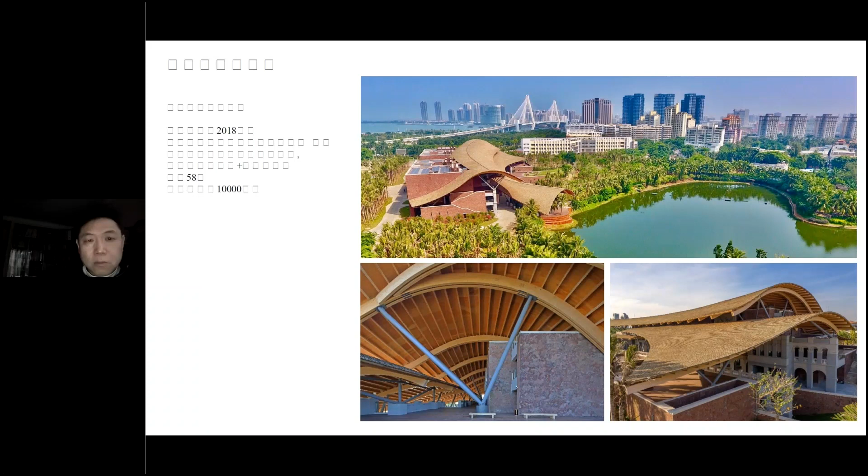And this is the first time we're using glulam products from Austria, that's back in 2018. We had a project in the very south of China, on an island called Hainan Island. These curved glulam members are all shipped from Austria, and it's basically about 800 cubic meters, all also customized.

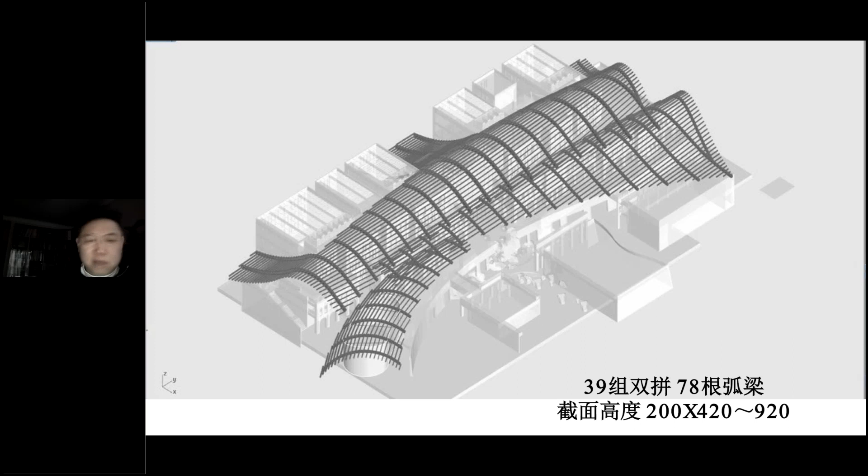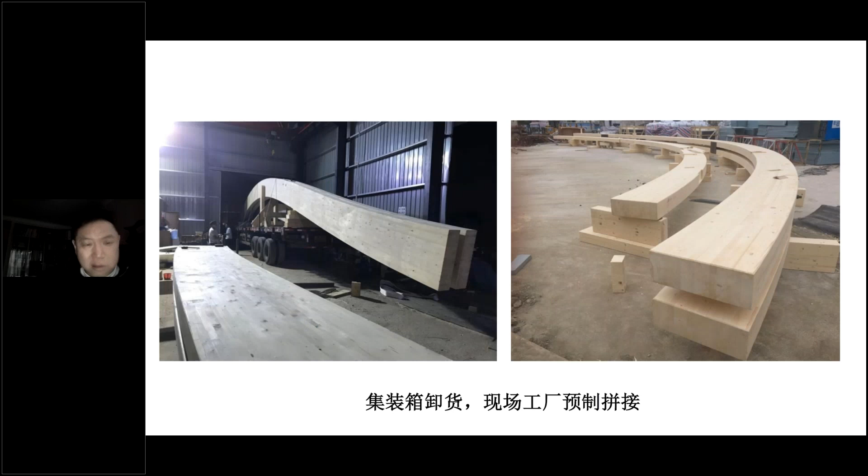They have different variations of section members, different lengths, and we basically put them together. We're using a factory on the site, and then we put all those members, different curved members, together on site, using screws and different kinds of connections.

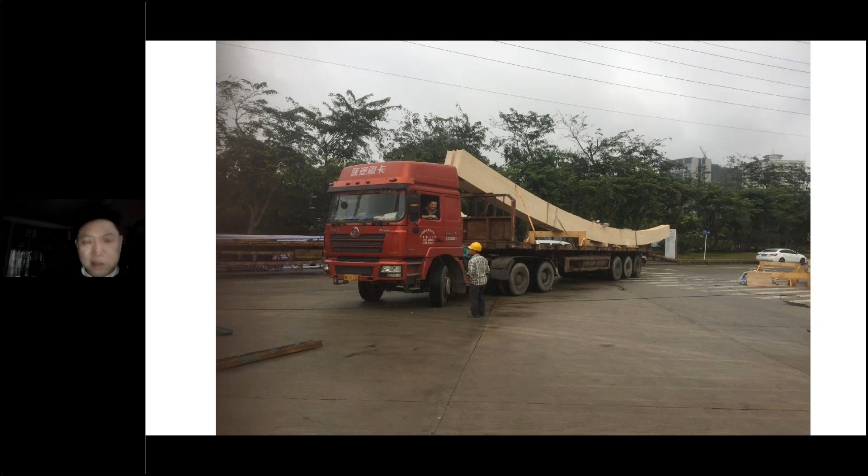Then we're lifting it up in the air and shipping it by big truck on the site for the whole piece of the members. And then we basically install that on the steel columns.

So what I'm talking about now is 3 case studies, but what we've been learning is how are we going to turn wood into a real building in China? We normally face a lot of challenges, like the speaker just talked about, we have code issues, and now we definitely have official codes published.

The owner's concern normally comes from, first of all, the cost. In some very good high quality buildings, the cost of wood is more competitive than steel, because for steel or concrete, they still have to apply a lot of interior decoration to make it look nice. But the nature of wood is we don't need that step.

Besides the cost of the wood and the cost of the building, the owner also worries, especially government officials worry about fire safety issues. So that's one of the major issues we have to work with. And also maintenance, that's going to be another issue.

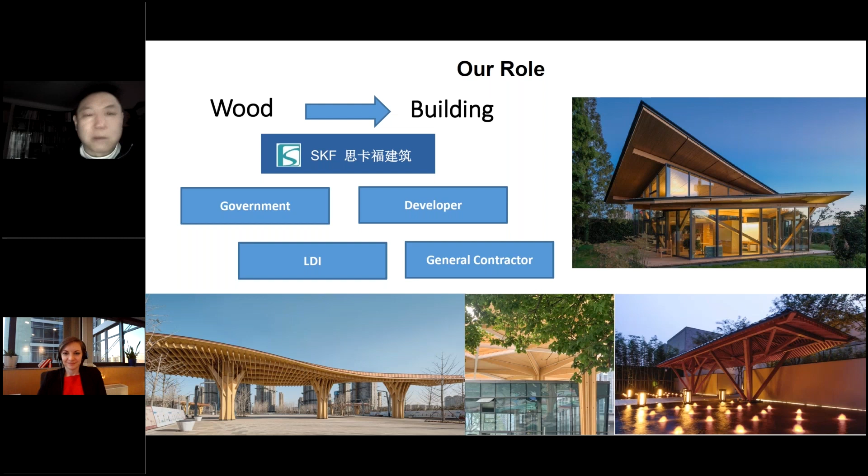I hope we have the opportunities to work with the industries in Austria to make those things happen, becoming the landmark of each city. Then hopefully we can get a lot of people to copy this type of project. Thank you for your time.

Thank you very much. Quite impressive projects that you worked on here, and thanks for presenting them to us.